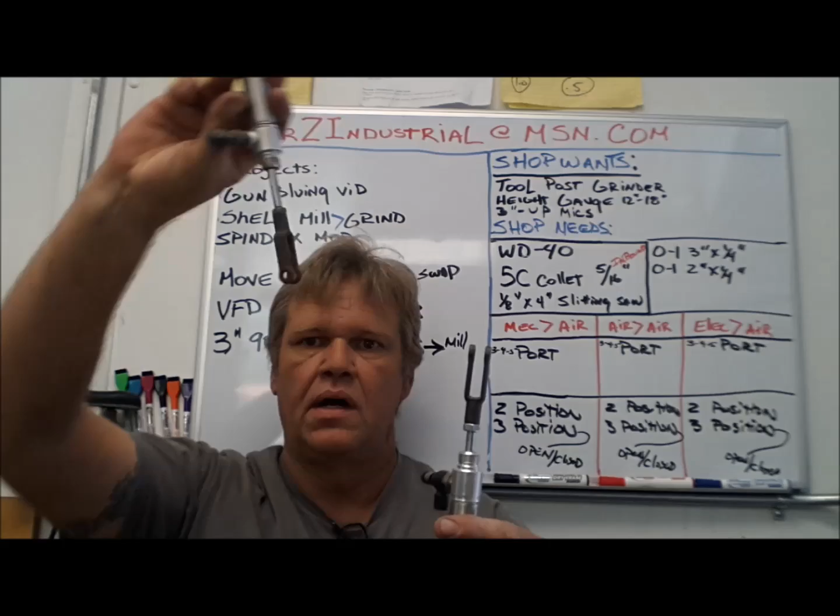Hey guys, I was going to just do a little short subject today about pneumatics. I know some of you guys are working on some power drawbars, and what Ray Kniglia started. He started by building the control, and he's essentially built a 3-port non-exhausting valve, 3-position. So it's got 2 operating positions and 1 idle position. And I was going to kind of explain to you the different types of valves and then go over your specific application and show you how to make it work.

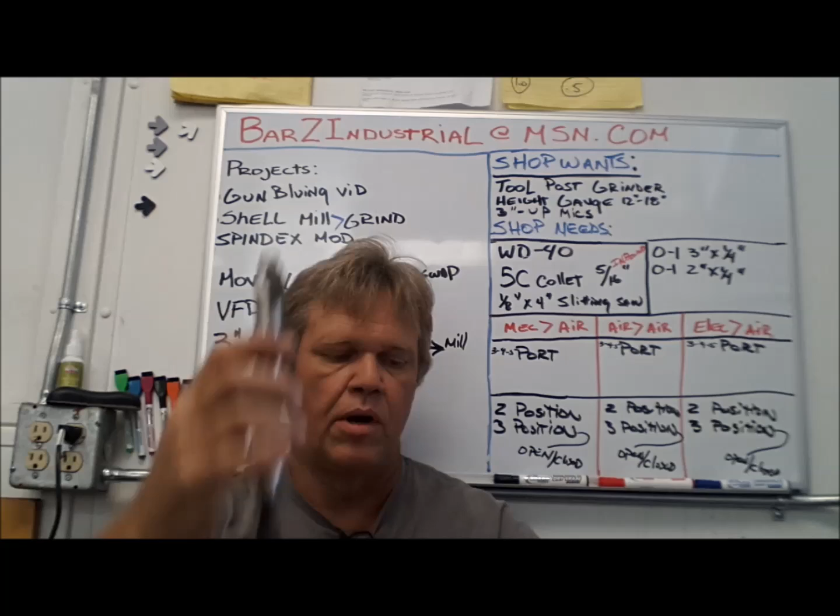And Ray, I see it. You're going to try to use 2 air cylinders, and I think I know why. You're trying to do 2 different things. You're trying to run a butterfly or a handheld impact in opposite directions, but you still want the air cylinder to do the same thing every time. And you can do it with 1 air cylinder, and I'm going to show you how. And I think a single air cylinder is going to kill 2 birds with 1 stone. You could center mount that air cylinder.

Here, I got a couple air cylinders here. If you've got these guys here, and this one works on the up, and this one works on the down, and your top plate, it wants to move up and down, but also it wants to pull down this way, and then down the next cycle it wants to come down this way. So it's doing this, and eventually you're going to wear out that top plate, and it's going to get jammed up and locked.

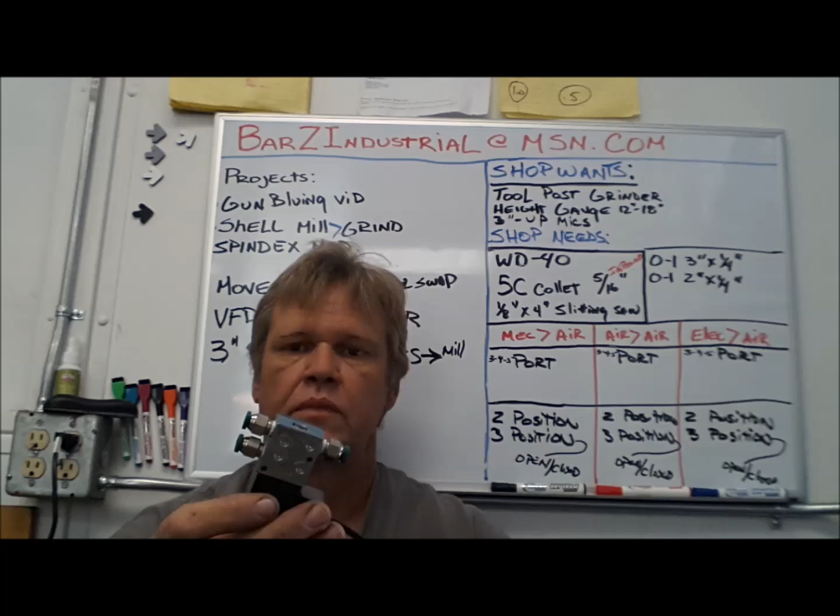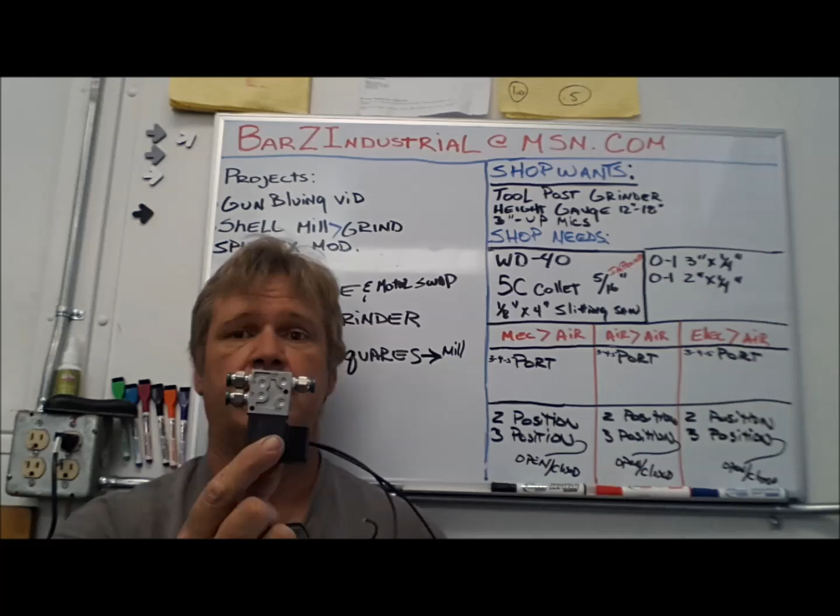And instead of running 2 side by side the way you are and teeter-totter in the top plate, like I'm saying, let's get you 1 cylinder dead center up in the middle. Push straight down, straight up, dead center over that butterfly, and pushing down on the drawbar. And I'm going to show you how to plumb that and get the logic into it pneumatically. And the valve you have that you've already made is going to work. That's just a 3-port valve. It doesn't need to exhaust. Cylinders require an exhaust, but butterflies do not. And you're sharing the circuit, so the butterfly is going to act as an exhaust for the cylinder.

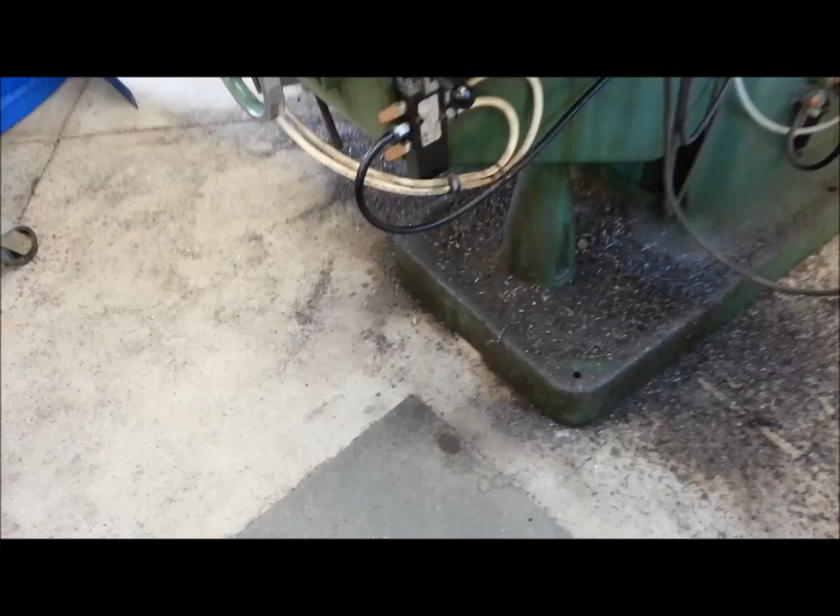I'm going to show you, here I wrote some down to kind of help you. There's 3 types of air valves. There's mechanical over air, air over air, and electric over air. Mechanical over air is what Ray has built. That just takes mechanical motion directly on the air valve to operate it. Air over air is where you take a remotely mounted pilot device and run small air hoses from the pilot to the main spool or the main valve, and let that pilot operate the main valve. And so you take small hoses back and forth from the pilot, and then the big slave valve is what does your air switching. And that would be the complex valve, the spool, and it could be a 4, 5, 8, 10, 12-port valve that does many things from many different remote locations.

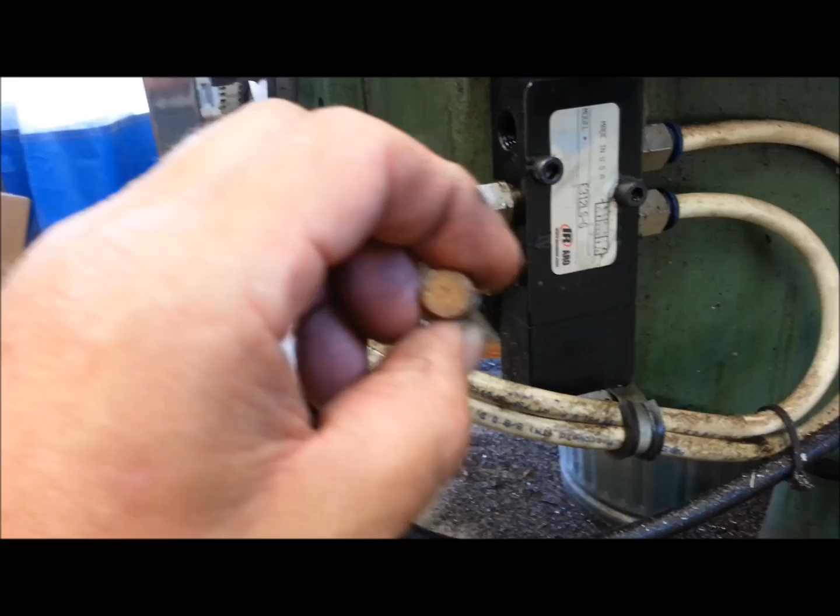The other way is electric over air. And I've got some solenoids I was going to show you. These are very compact, nice little solenoids. We got 1/8 inch pipe, but they take a 1/4 inch line with the Prestolok fittings. And this is a 2-position. That's another thing we got to talk about, the 2-position and 3-position type valves. This one, when power is applied, it puts air in this way. When power is removed, puts air this way. Pretty simple. But there's no center position.

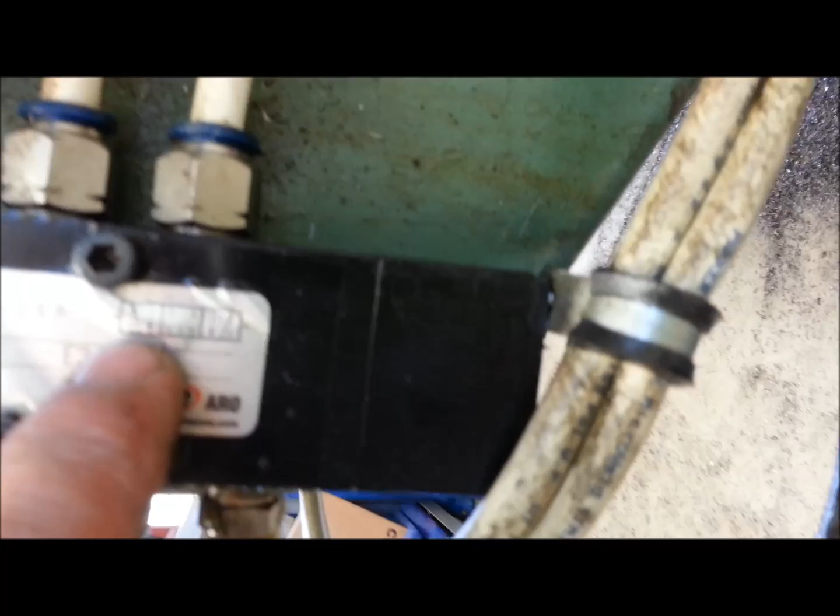There is no off. What Ray has made is a 3-position. And that's called a closed center. See, in a 3-position, you can have an open center or a closed center. In a 2-position, there is no center, so we don't refer to those as open or closed. And that's the same for all 3 types of valves. So in these 3 types, you've got 3, 4, and 5-port in all 3 types. In all 3 of these types of valves, you've got 2-position and 3-position. 3-position valves are the only ones that are going to have an open center or a closed center.

And I'm going to walk you over to the mill and show you a 3-position mechanical with a closed center and show you how it operates. That is operating an air motor, so that one requires an exhaust. And that is a 5-port valve because you use the 2 extra ports to exhaust.

Now an impact or a butterfly is self-exhausting. It's bleeding its own air off out of the butterfly, so you don't need to run an exhaust. And let me walk you over to the mill and I'm going to show you that.

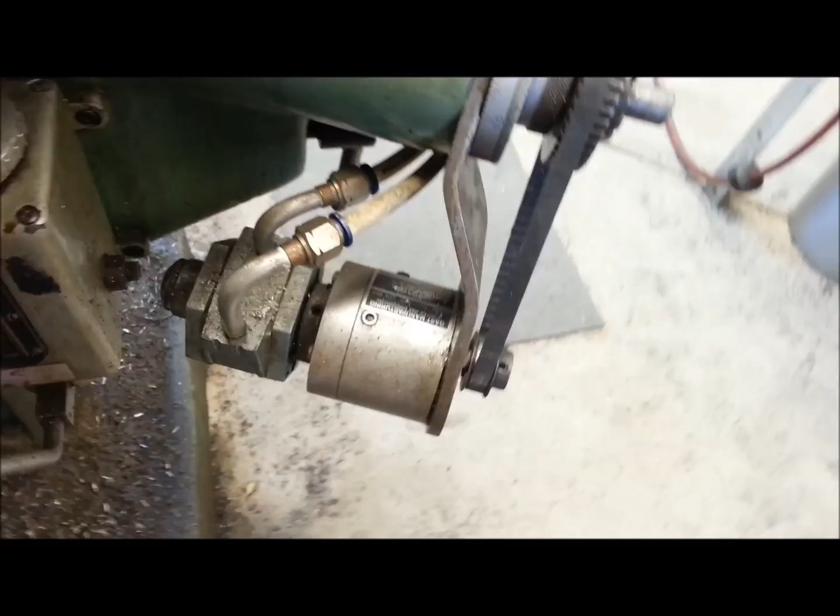Okay, here's an example of a mechanical over air 5-port valve. Your incoming air is the black. This is line pressure. This goes off to my load, which is up, down, in, out, whatever you want to call it, up and down. And then the other two, these little sintered bronze elements, those are just an exhaust. And so this is a closed center 3-position 5-port valve.

You have to know all the parts of a valve. And reading those little charts on here isn't as hard as it looks. If it's a 3-position valve, each one of those boxes represents a position.

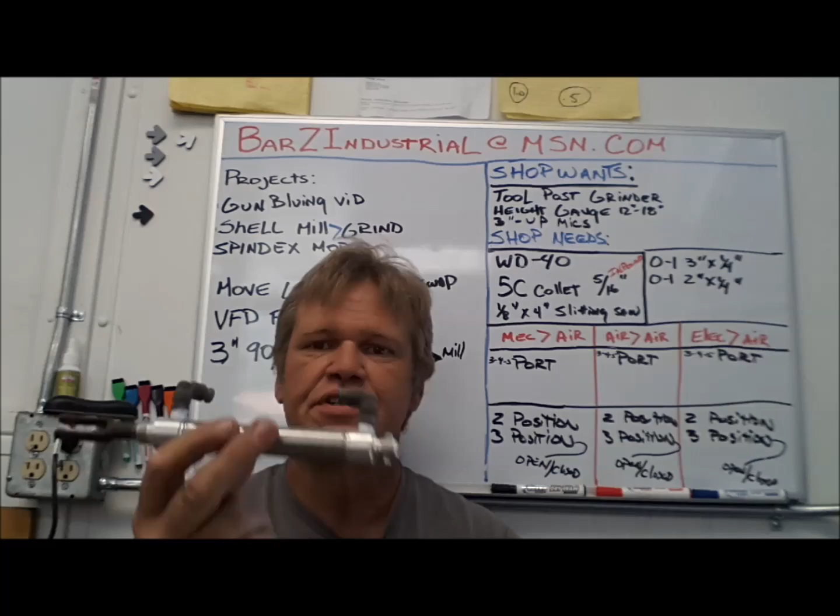I'm trying to focus on that and it's not focusing. Let me get my finger out of the way.

The box on the left indicates the up position. The box in the middle indicates the center position. And the box on the right represents the down position. So here's down. Hang on to your ears. That's my power axis feed. But anyways, in the neutral position, you can see all the valves are blocked. So this is a closed center valve.

And on this side, that's when I just pulled the lever down. That's this box. And if I was to push the lever up, that would be this box. So that's how you read those diagrams that you see on the side. And each one of those, there's a number on the port, and it shows an arrow either connecting the ports, or it shows a little line going across showing the port is blocked. And there'll be either a number or a letter right next to each port. So that's going to kind of help you out with your valving. All right.

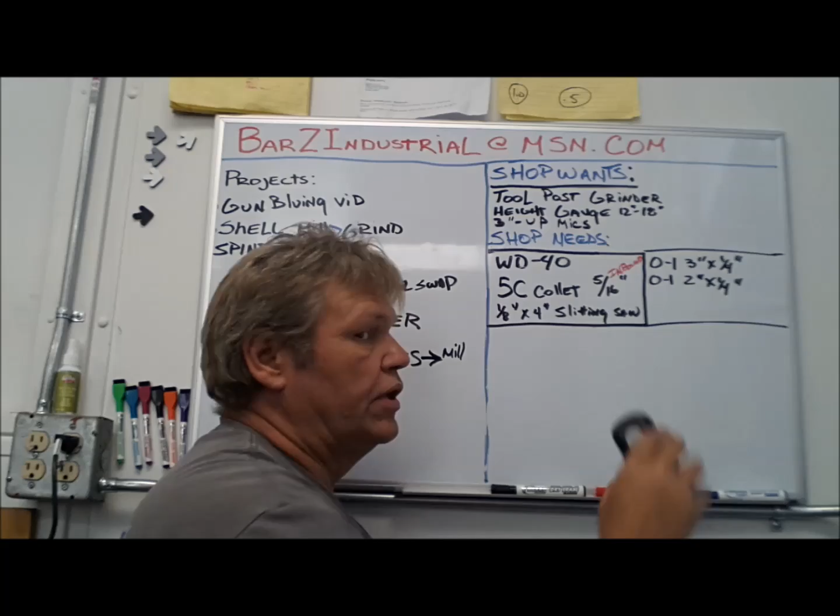This one is running an air motor. I've got that white line coming around to a little geared air reduction motor here, and that runs my Z-axis feed because I get tired of cranking a handle. Essentially, I'm a lazy guy, so that's what that's running. But anyways, that's a good example of a mechanical over air valve.

Okay, and we're back, and now we're going to talk about air cylinders and air cylinder speeds. This is just your garden variety air cylinder. These are just open fittings. There's nothing special about these fittings. They're just little swivel push to connects. But that air cylinder there's a rocket. Put air to it, boom. Take air the other way, boom. It's just full speed ahead. This thing will hammer the hell out of itself in no time.

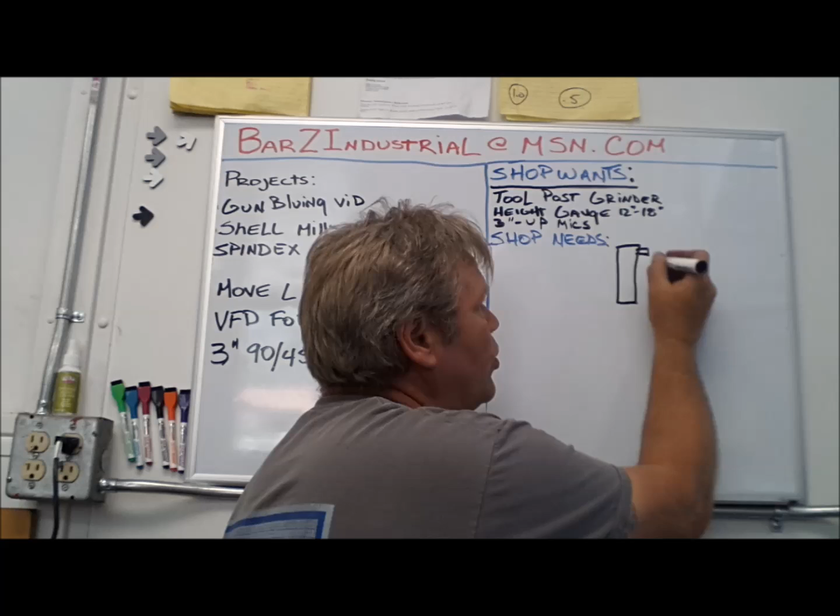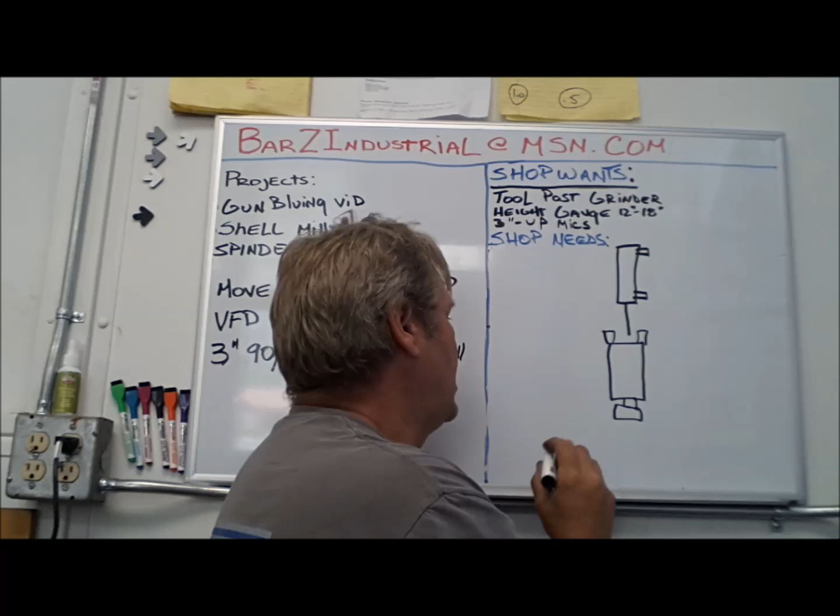What you do to prevent that, these are needle valves that are actually built into a very nice little swivel. And the metering valves right here. And what that does is that dampens the operation. I'm pulling on that as hard as I can and pushing on that as hard as I can. And you adjust the needle valve to control your speed. That does not change the operating force of the cylinder. All it does is change the operating speed.

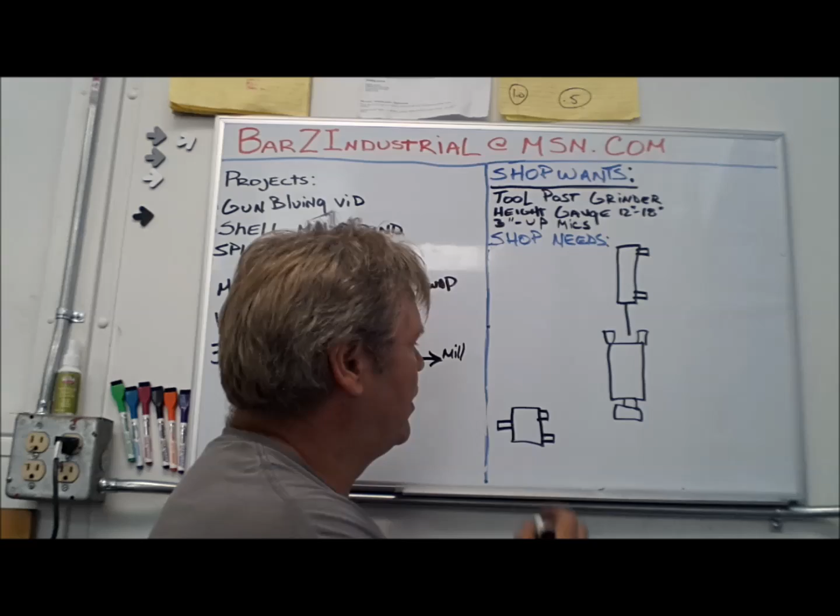So based on your pi calculation for the diameter of the cylinder and your line pressure coming in, the speed is going to be very slow. But after it applies the pressure and the pressure builds in the line going to the cylinder, you're still going to get the same amount of force, whether you use 40 psi, 80 psi, 120 psi, whatever. Operating force and cylinder speed have nothing to do with each other.

All right, let's draw your circuit that you want to use for your power drawbar.

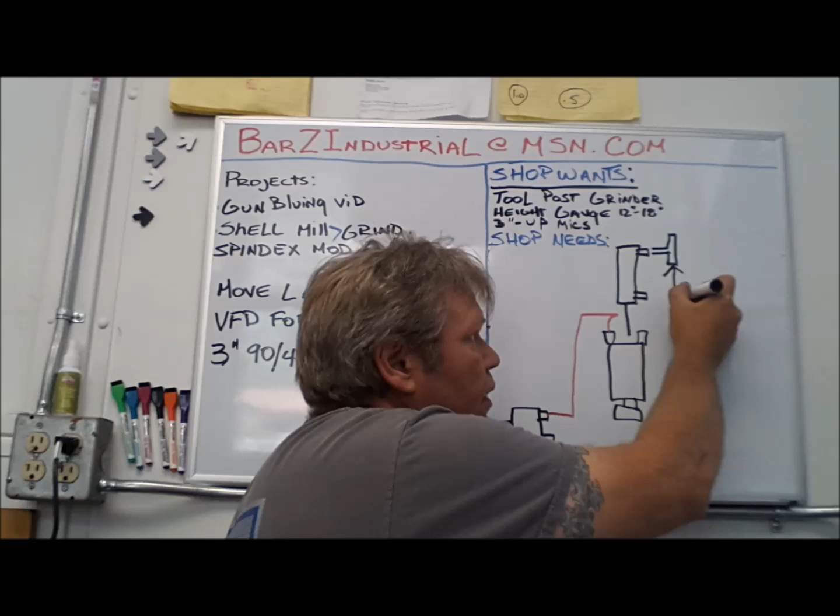And what we're gonna try to do is use your 3-position closed center valve that you're already making to run the butterfly. We already know it's going to run the butterfly fine, but we want to run a single cylinder in the same direction no matter whether you're going forward or reverse.

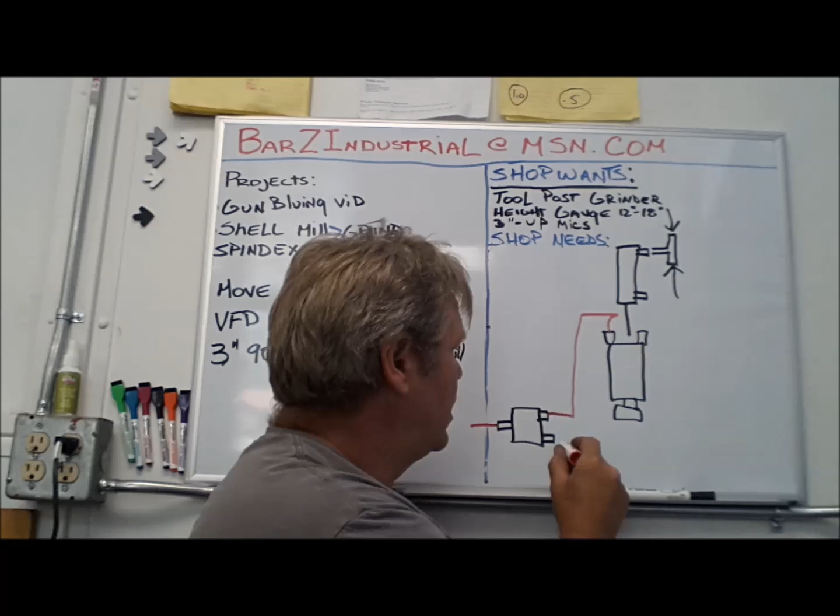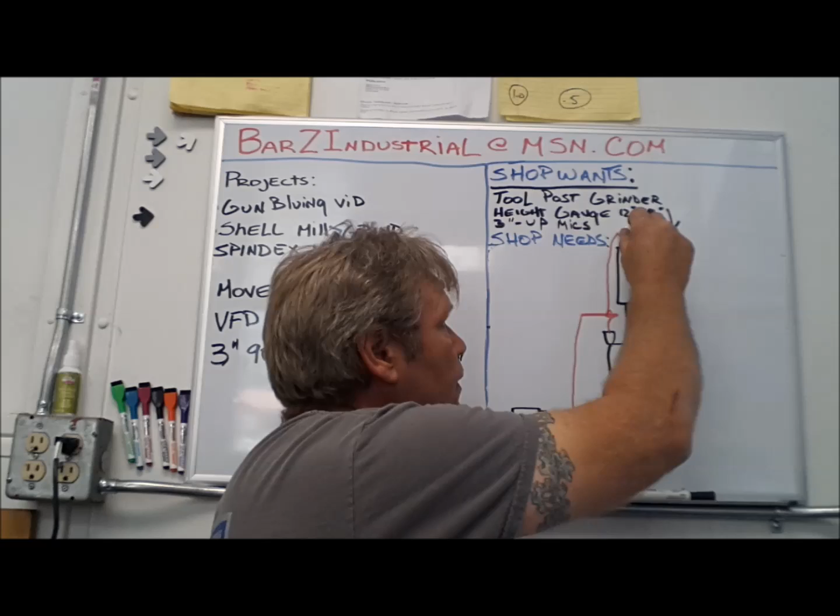So we want to reverse the butterfly, but we obviously want the air cylinder to work the same in both up or down, or in or out, whatever you want to call those buttons. You find a couple colors here.

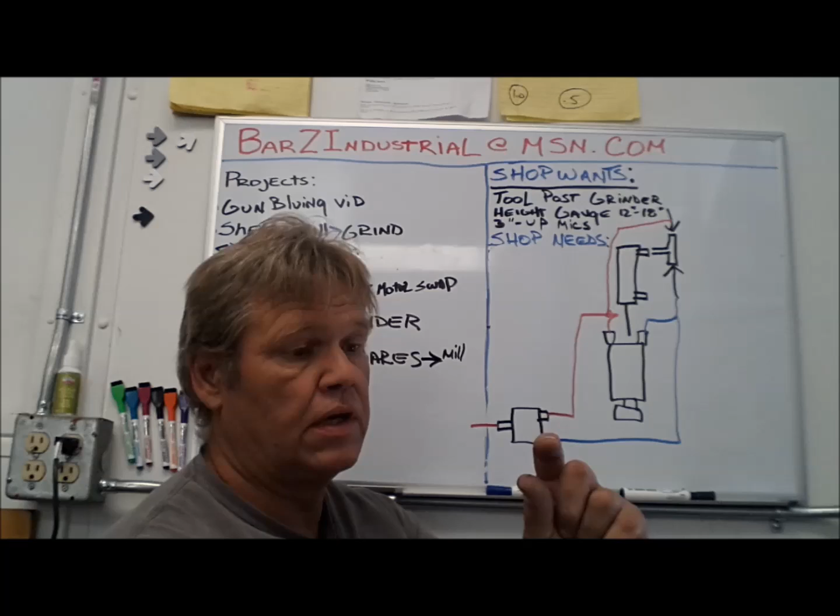Oh, I need a little more room to write. Let me erase some more stuff. So much for the shop needs. I guess I don't need anything anymore.

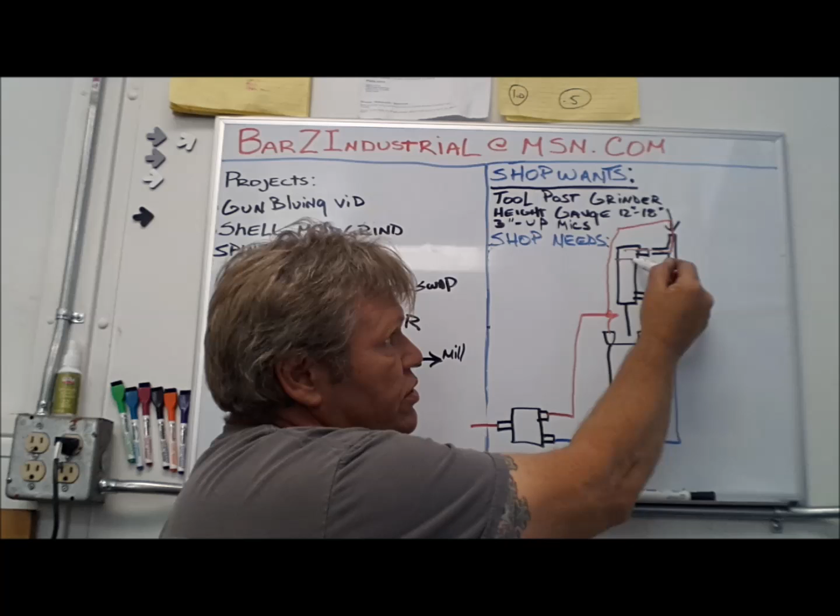Okay, so we're going to have an air cylinder here. We're going to have a port here, and a port here, and a rod. And then we're going to call this your butterfly. And we're going to have two ports there. And that represents your socket right there. How's that? And now we've got a 3-port valve here. And here we'll just do the 3 ports here.

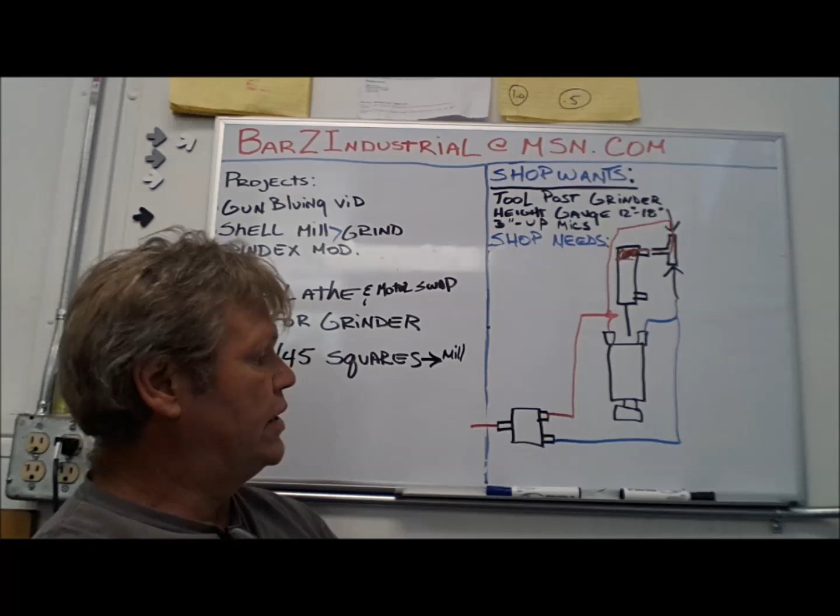All right, you got that? Are you getting all this?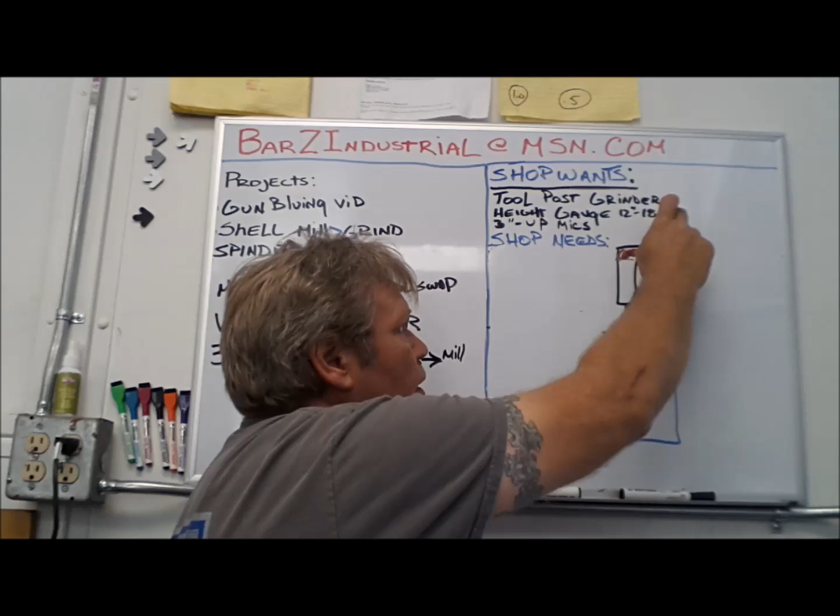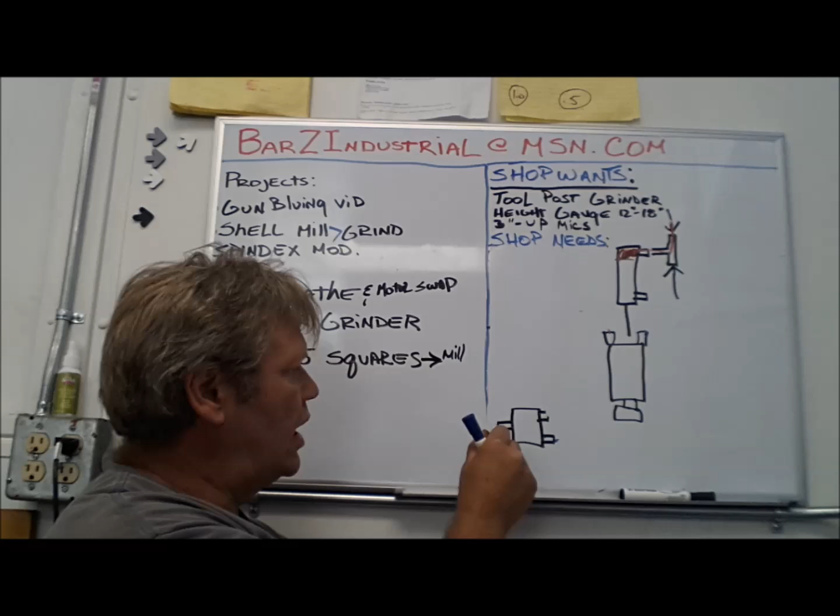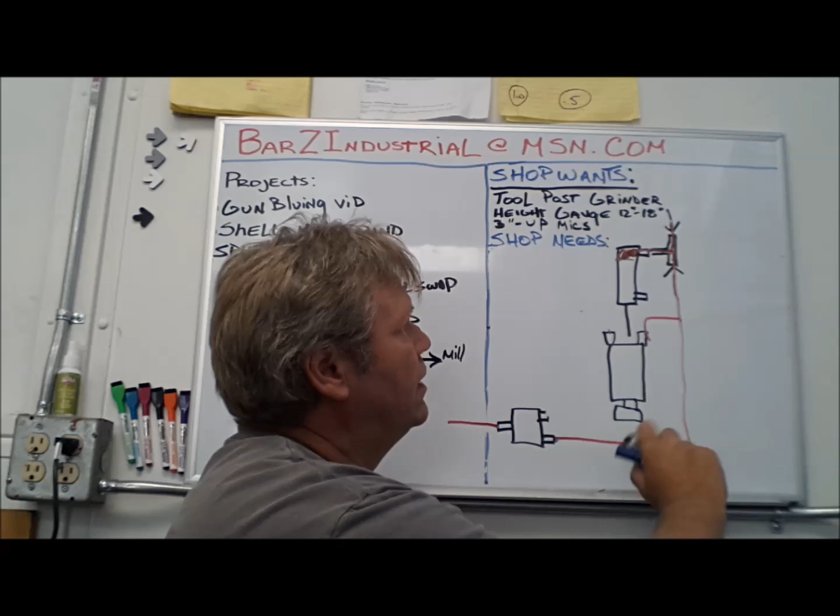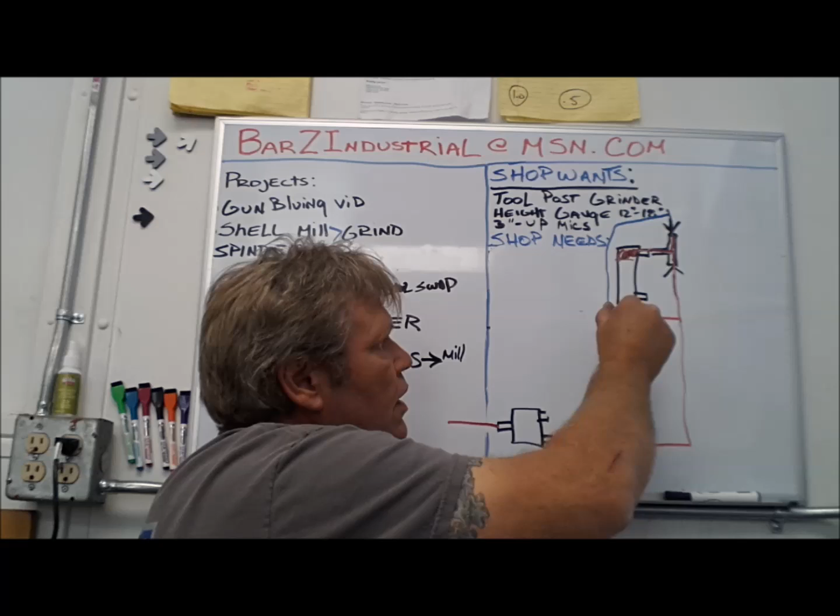Oh yeah, good. All right, red is going to indicate line pressure. Blue is going to be deflated. So first we're going to draw air to there, and then we want to pressurize here. And I'm actually going to draw the T. There's going to be a T there. And these are going to remain a constant. I'm running out of room again. And blue is depressurized. And red is pressurized.

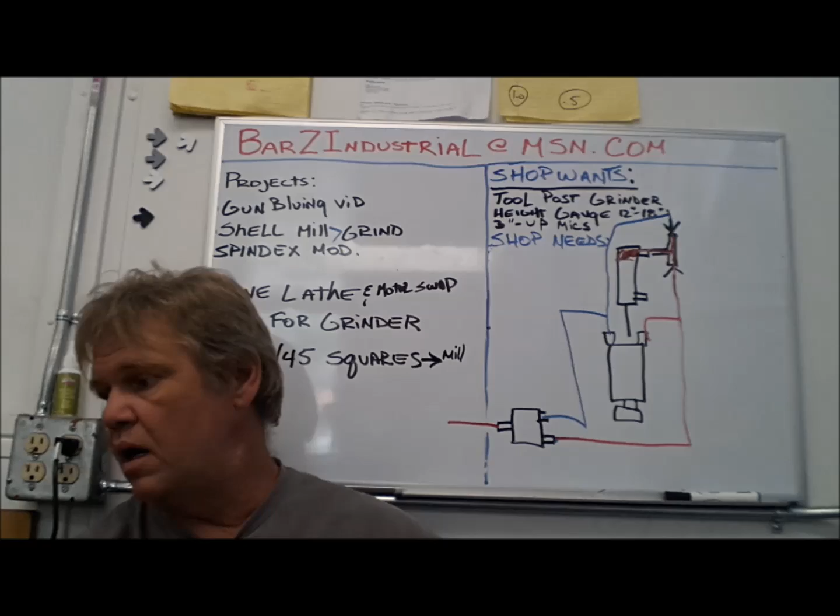Now, what those 2 arrows represent is a check valve. That is a one-way valve, and you can get very miniature ones. They're going to screw directly on the cylinder. And this valve will allow air to flow this way. So air is going to come in here and charge the back of the cylinder. So the cylinder is charged here in the back.

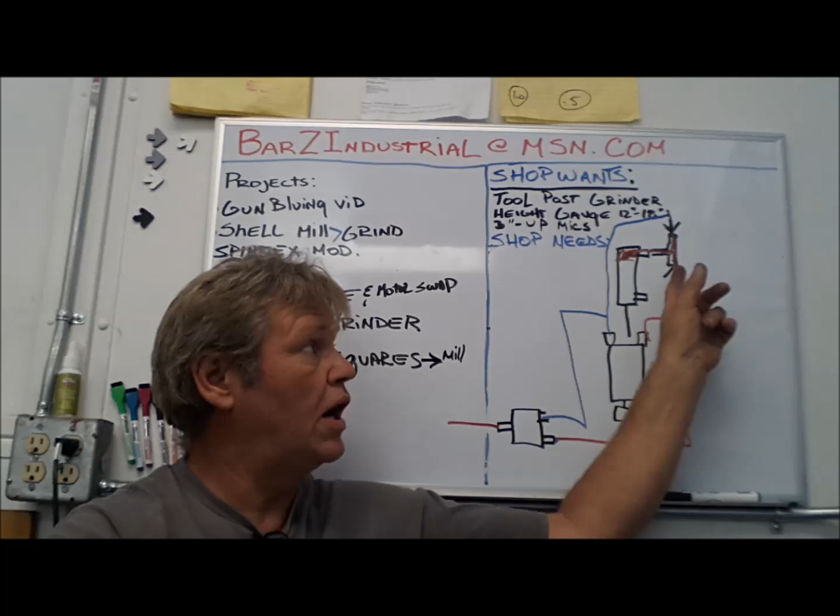So line pressure in, switch activated in the up or down or in or out, whatever. This line is charged. Your impact is running. It's flowing through that check valve and filling the cylinder, creating a downforce on the cylinder. Okay, let's erase that and switch the circuit the opposite way. Remember, we've got a check valve here, so you're blocking right here. All right, so let's draw this the other way.

Oh, aren't whiteboards fun?

Okay, now we're going to press this 3-way valve. We've still got line pressure here. That's just your incoming air. Now we're going to press this switch in the opposite direction. Now we're going to put air on this side, apply it here. We're going to fill up this T with air. We're going to pressurize the cylinder again.

But remember, now we're blocking right here with that check valve. So now you're blocking here, so this remains unpressurized to there. Okay, so your air cylinder is acting the same way and doing the same thing no matter if you switch your impact forward or reverse. It does not matter. That air cylinder is going to act the same way.

And so I think the cylinders you guys are using are going to work, but you only need one. You don't need to do 2 of them. And that gets rid of the rocking problem for the top. And as far as your cylinder speed, don't worry about that. I got a bunch of these things. I'm going to take these needle valves off. These are 1/8 inch NPT, and they take a 1/4 inch poly line.